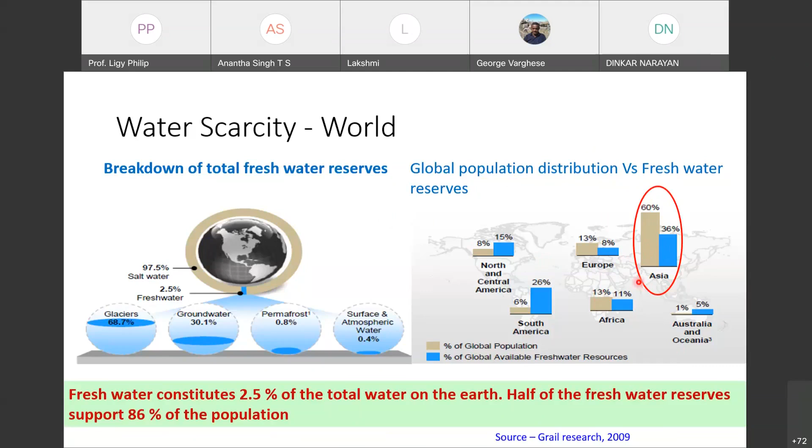But when we come to the Asian continent, around 60% of the population is here, and we have only 36% of the water. So definitely, the maximum water stress or water scarcity will be faced by this region.

Now coming to annual freshwater withdrawal in 2013-16 data, you can see the places where maximum freshwater withdrawals are happening. America around 485 billion cubic meters per year, and India much higher, 761 billion cubic meters per year, and this is China. So these are the major countries contributing maximum withdrawals.

And if you see the water usage, maximum water is being used for agriculture purposes, more than 80%. Then domestic contributes around 5 to 10%, then industrial use. And between whatever we are extracting and consuming there is also a gap, because a lot of losses are happening. That's why you can see the difference between extraction and consumption.

And wastewater generation in India is around 13.87 billion cubic meters per year. A large quantity of wastewater is getting generated, and many agencies have stated that nearly 6 billion people will suffer from clean water scarcity by 2050. It is going to happen, and this is the data shown by NITI Aayog recently.

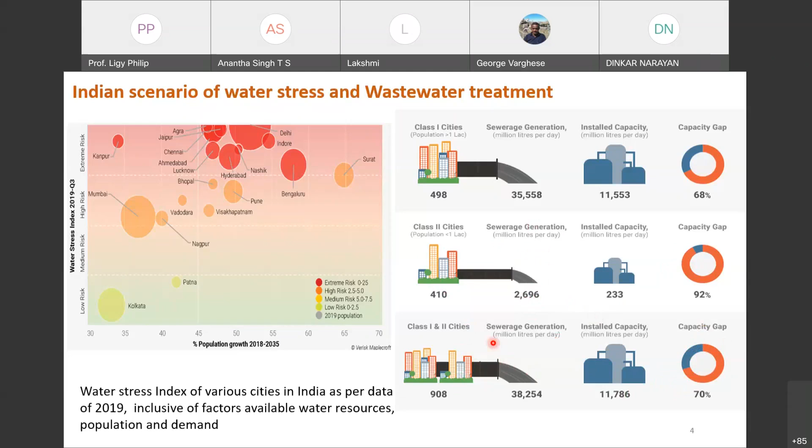So now, when we discharge untreated or partially treated wastewater, a lot of organic matter is there, and biodegradable organic matter is relatively easy to degrade.

But even if you treat, most of the treatment plants will not be taking care of the emerging contaminants like pharmaceuticals, personal care products, etc., and nutrients present in the wastewater. So when we discharge this, pollutants will be remaining in the partially treated wastewater, and they are mostly persistent. So they will be contaminating the water sources where it is being discharged.

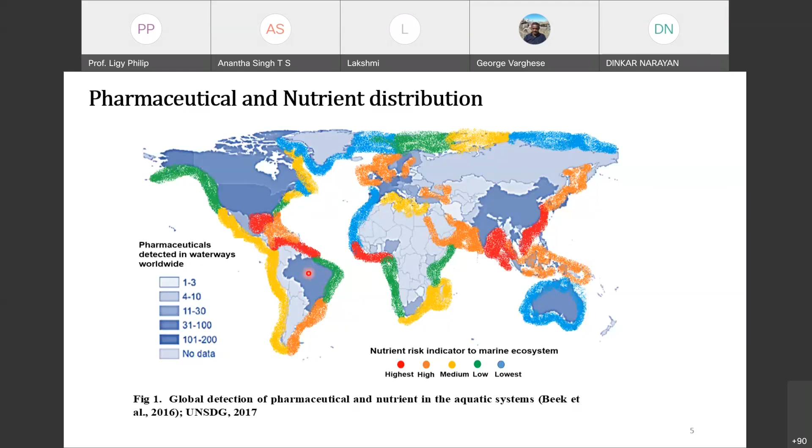So now, coming to the current wastewater treatment practice, if you see, what are we doing?

Are you able to hear me? Yes, madam. Yes. Yeah, because somebody was telling that there is an audio problem. Some message I have seen on that side. Yeah, I'm sorry.

Current wastewater treatment practice. So we are generating wastewater without any control, and in some places it is collected, and in some places it is not getting collected, and treatment is there, and no reuse and recovery. Most of the water is getting disposed into the existing water bodies, with mostly primary or secondary treatment. And we have seen that only 30% is even getting secondary treatment. Others are not even getting that. And in many places treatment compliances are not there at all. So this is the present scenario.

But if you want to be sustainable, this is not what we have to practice. We have to reuse and recover all the resources, but that is not happening much nowadays. So that's what I told. We have to meet the treatment compliances and go for circular economy. This is the only sustainable way. So when we want to reuse and recover the resources, we have to care about the residual pollutants present in the system, their after effects, the risk posed by them and all the things. And we should have technologies to remove even the minute quantities of these emerging contaminants. Otherwise, if you go for circular economy, it will create more problems than solutions in the long run.

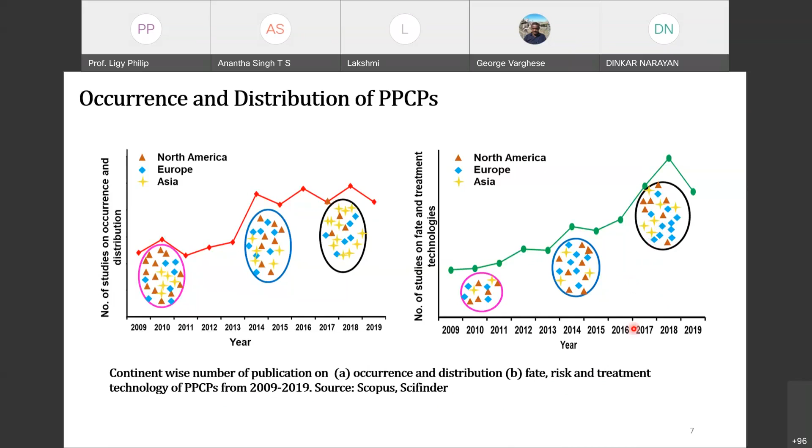In the different regions: initially it was dominated by North America and Europe. Then Europe took over, Europe also came up to that level, and you can see that Asian studies were very, very limited. But now most of the Asian countries are also concentrating on this because they realize the importance of these aspects, how much problem it can create.

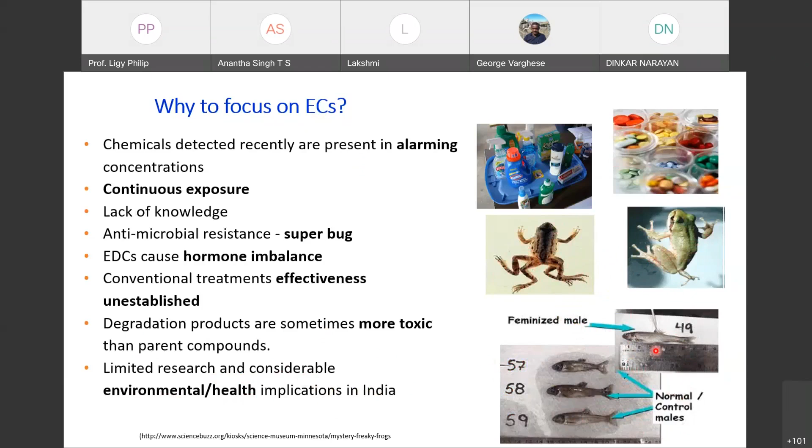In India, only very limited research is being carried out, and there are considerable environmental and health implications for India. That's why we have to concentrate on these emerging contaminants. These are some examples: a feminized male frog, normal control males and feminized, and you can see deformed aquatic organisms. So these are all the problems of ECs, and definitely we have to attend to the awakening call.

All over the world, the presence of antibiotics in sewage is reported, and sewage can be a major source of antibiotic resistant microorganisms and antimicrobial resistance genes. The interaction with bacteria in sewage treatment plants is a main consequence of the development of antibiotic resistant bacteria. And the NDM-1 gene, known as New Delhi metallo-beta-lactamase 1, also called the superbug, was discovered in Delhi. NDM containing bacteria are resistant to a broad spectrum of antibiotics.

A lot of issues are coming up about antimicrobial resistance, and these genes can get transferred to other microorganisms, and this will be enhanced in the presence of other pollutants like heavy metals. So we have to be extremely careful about these emerging contaminants, otherwise it will lead to a lot of problems. Imagine a superbug causes an infection for you, and none of the available antibiotics is going to work. What will be the scenario? It will be worse than COVID.

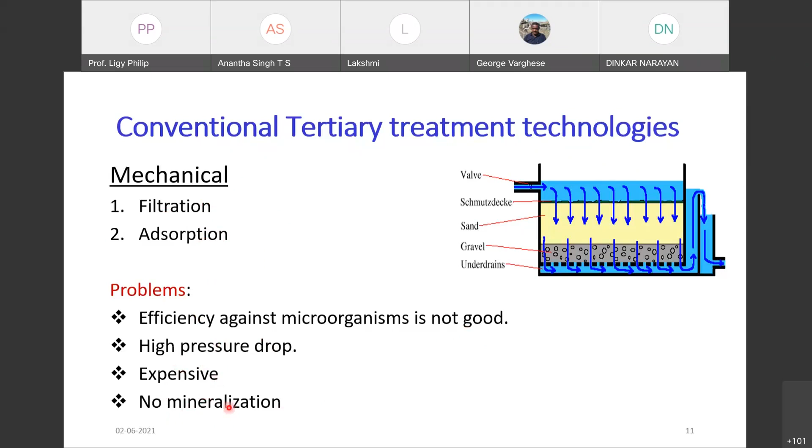This one will be able to remove your suspended solids and all, but when it comes to emerging contaminants, it may not be that effective. Something may get removed, but it will not give you complete protection. What are the problems with this one? Efficiency against microorganisms is not good, because you will still be having fecal coliforms, and there's high pressure drop, it's expensive, and there's no destruction of the pollutant. These are the major problems.

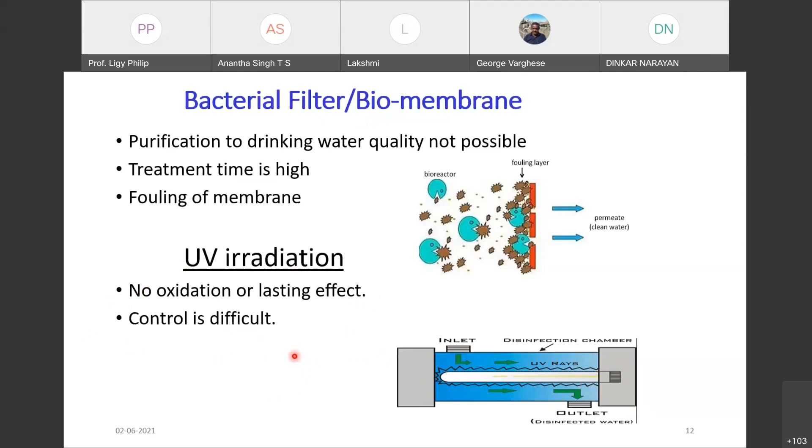Another tertiary treatment we adopt is UV radiation. UV radiation will just be denaturing, deactivating the microorganisms, and it is not a lasting effect. Sometimes even the microorganism will repair itself and come back. And if you have a lot of suspended solids and dissolved organic matter, UV radiation will not be effective. So control is difficult. This is another conventional method.

Then we know chlorination. Many times we use it because it will be able to remove many of the residual organic compounds. Many times we have to add exact doses of chlorine, but many times what they do is fix a dose and add that one. So that will be oxidizing only easily degradable organic matter, and the remaining everything will be left over.

Another major problem is formation of chloramines, and you all know that these chloramines are carcinogenic compounds. Then if you add more chlorine, there will be a residual chlorine effect. And if you add insufficient dose, bacteria become partially resistant.

pH is also very important. Chlorination will be effective in acidic pH, not in alkaline pH, because when chlorine is added to water, it dissociates to form HOCl and HCl, and HOCl will dissociate to form OCl minus. OCl is not as effective compared to HOCl. One should know all these things when doing chlorination.

So now people are talking about advanced oxidation processes. There are various advanced oxidation processes available: heterogeneous Fenton, homogeneous Fenton, photo-Fenton, photocatalysis, ozonation. In all these cases, what are we doing? We are generating hydroxyl radicals. This hydroxyl radical has much higher oxidizing capacity compared to oxygen - its E naught value is 2.80, which is much higher than oxygen.

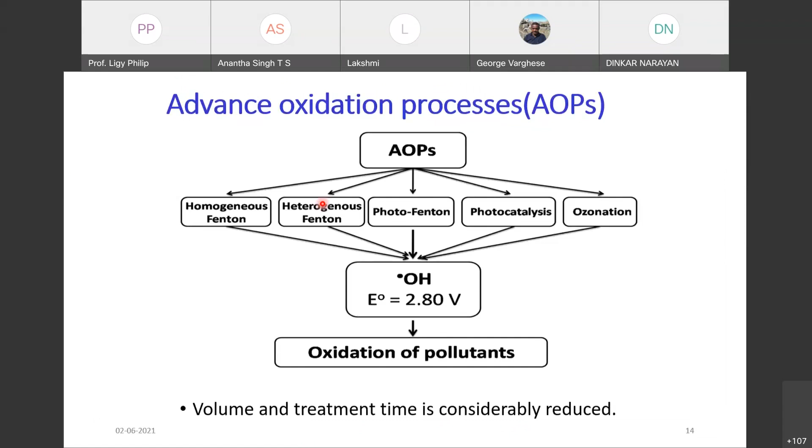Now we'll also see what methods are adopted for treatment of pharmaceutical industrial wastewater. They use physical treatment, biological treatment, and advanced oxidation process. Physical treatment includes coagulation, nanofiltration, reverse osmosis, adsorption, incineration, scrubbing - depending upon the type of pollutants. For biological treatment, they go for activated sludge process, biological aerated filter, rotating biological contactors, UASB, etc. And advanced oxidation process includes Fenton process, ozonation, photocatalysis, electrochemical treatment methods. All these things are being employed in pharmaceutical industry for treatment of wastewater.

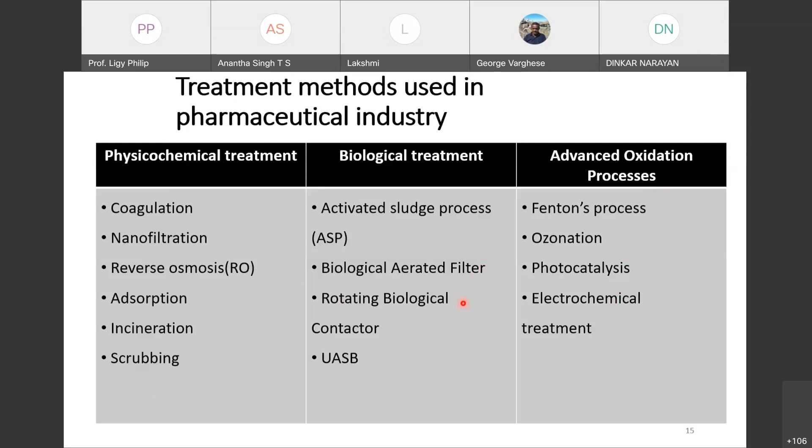But the limitations of conventional treatment methods, as I explained - nanofiltration has membrane fouling and huge concentrate volume. So managing this will be a big problem.

And when we come to adsorption, dissolved organic compounds and surfactants compete with binding sites, and there's the production of activated carbon. Another thing is here only the phase transfer is happening - you will not be able to destruct the pollutant, you are just changing the phase of the pollutant from the liquid phase, transferring it to the solid phase. But there is again a problem to treat the spent activated carbon and regenerate it.

Incineration requires energy, and scrubbing requires costly chemicals and their safe use and disposal. So these are the problems. Many places we have to use some sort of chemical or material, and that will be increasing the cost.

Now coming to biological treatment process - temperature, organic and toxic substances will all be affecting the performance of biological treatment. And chlorinated solvents are recalcitrant, and many of these PPCPs are also recalcitrant, so they are not removed by the microbes.

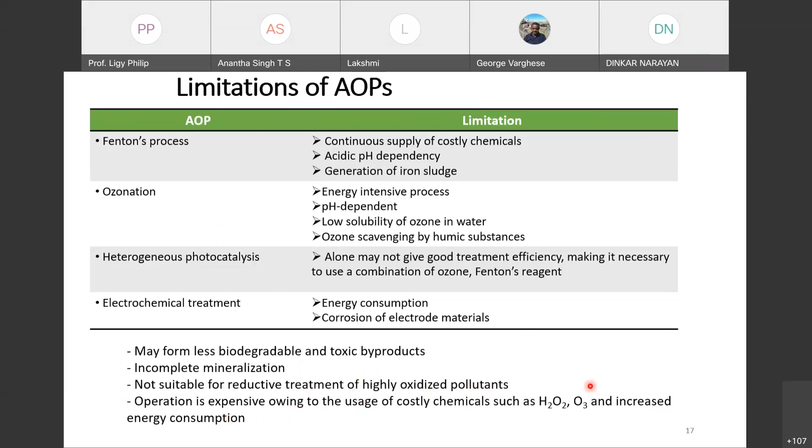Now we'll talk about pulse power plasma. Hope most of you have heard about this technology. Here we give a high voltage electric discharge, and as a result plasma is generated with physical and chemical effects. It will be having a large amount of oxidizing radicals like hydroxyl radical, nascent oxygen, and molecules like H2O2, O3, along with electrons, H, shock wave, and UV light. So oxidizing radicals are there, reducing radicals are there, molecules are there, shock wave and UV light are there. You'll have a very, very reactive environment when we apply this high voltage electric discharge.

Another thing to remember is no chemical addition is needed, no demand on temperature and pressure, and it is insensitive to contaminants. So we don't have to bother about the organic loading rate, and even if the loading is not continuous, the system is not going to be affected. It can be used for treatment of contaminated water, air, and soil.

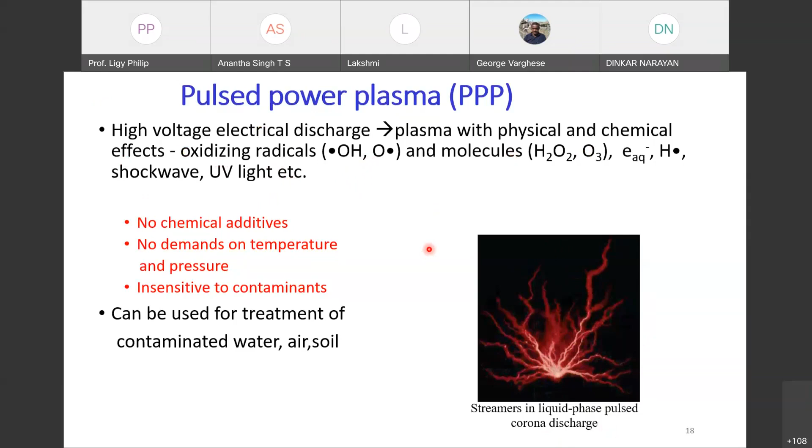Here, what we are doing is high voltage pulse corona streamer discharge. We store a lot of energy and then do a sudden release. When we do a sudden release, a lot of energy is generated. Imagine a dam with a lot of water and we open it instantaneously - what will happen? Lot of energy. Or how are we kicking a football? You kick the ball and at a stretch give a lot of energy. That is what is happening in high voltage pulse corona streamer discharge.

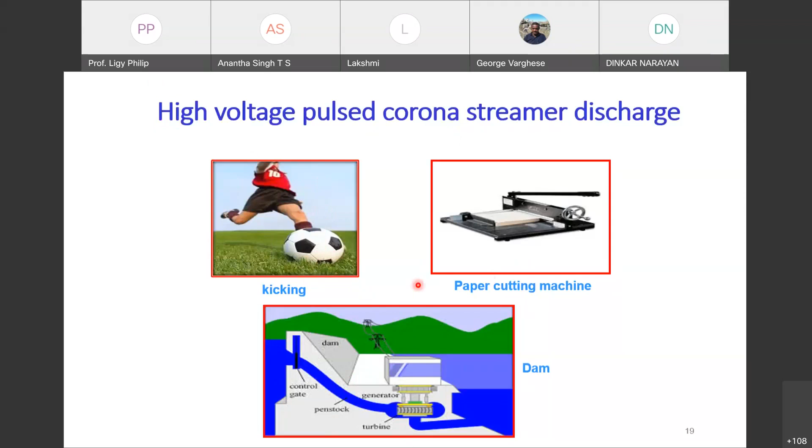So you have dissociation, and vibrational or rotational excitation. Dissociation: water plus electron gives you OH, H dot and E. Ionization gives you 2 electrons and H2O plus, and H2O plus H2O gives you OH and H3O plus.

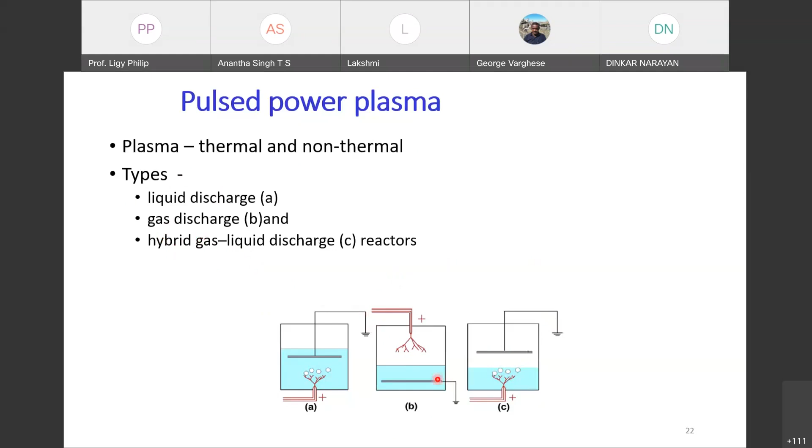And hybrid - you can see some amount is in the liquid and some in the gas. So depending upon your requirement and the nature of the pollutant, you can adopt any of these methods.

So I'll give a summary of this plasma technology. Plasma generates energetic electrons, excited species, free radicals, ions, molecules, and photons. All these we get, as you've seen in the reactions, produced by the ionization of gas through high voltage electric discharge, initiating a series of chemical and physical reactions and effects.

And reactive species, as I already mentioned, all these species are generated. So you can have oxidation, you can have reduction. Highly oxidized compounds and highly reduced compounds can be treated by this method.

Am I audible? Yes madam, yes madam, audible, but at times there is oscillation, some sort of disturbance. So maybe the net problem - I won't be able to do much about it.

So when we talk about plasma technology, it is a combination of various advanced oxidation processes. We have seen various advanced oxidation processes, but when we talk about pulse power technology, we can consider it as a combination of all these AOPs, or it will have the effect of all these advanced oxidation processes, because you get all the species usually present in advanced oxidation processes, and you also get some reducing species.

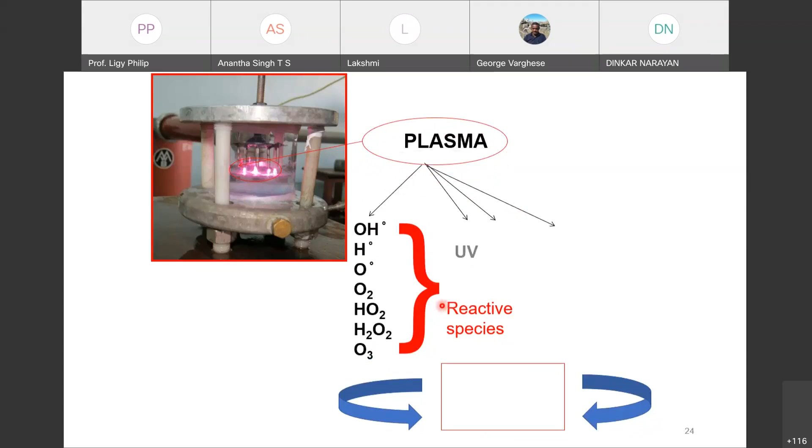So what are the things here? You have OH radicals, H radical, O, O2, HO2, H2O2, O3, UV, high electric field, intense wave. If you see the oxidation potential: hydroxyl radical 2.8, nascent oxygen 2.42, ozone 2.07, H2O2 1.78, and oxygen is around 1.42 or something like that.

So everything is having very high oxidation potential.

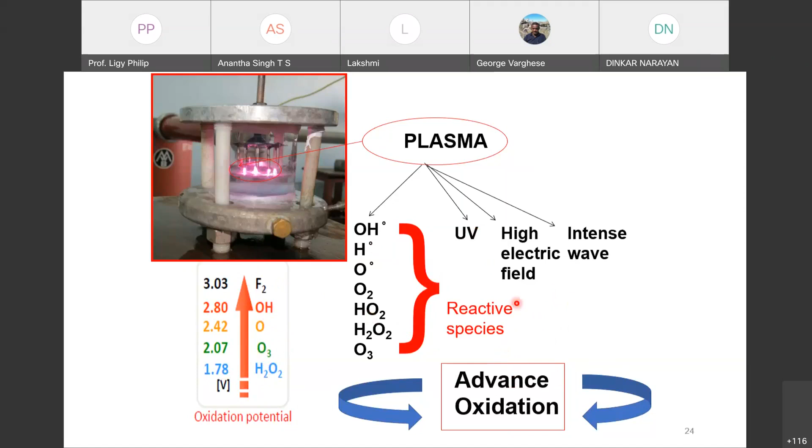So naturally it is an advanced oxidation process, and I also told you it is capable of reducing the compounds also. So first I will talk about how we started the initial things, because nobody was aware of this one. So we just started in 2013. The first person who worked in this area with me was Dr. Raj Kamal. So initially we had to understand all the mechanisms.

So we did the reactor setup, optimization of electrical and physicochemical parameters, quantification and kinetic study. Then we carried out a batch study to understand, then mechanism of degradation, toxicity. Then we went to a continuous study. So this is what we did first, and what we did after that, I'll explain during the course of time.

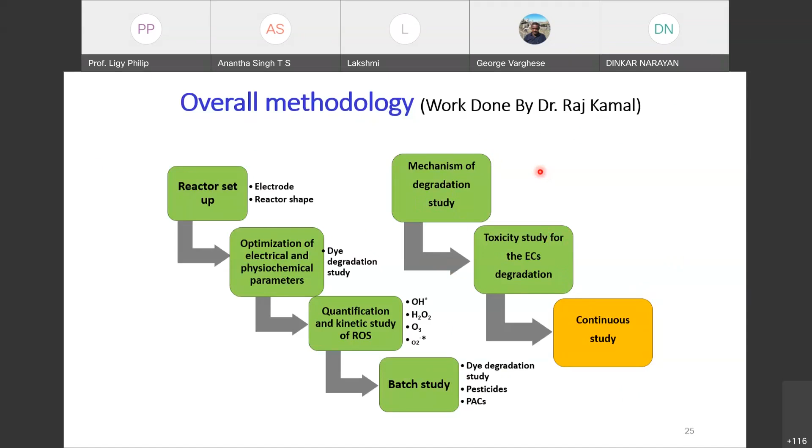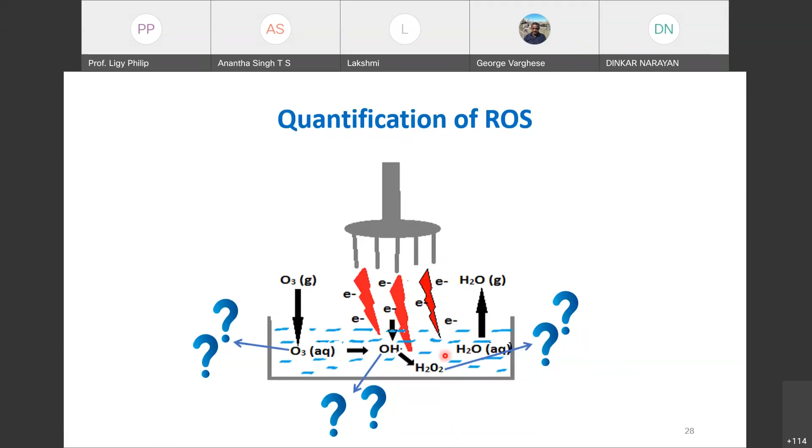Initially we did not know how to quantify all these things, so we had to develop the methods. For hydrogen peroxide, we followed the reaction with the titanyl ion. For ozone, the DPD method we followed. For OH radical, the hydrazone reaction, detected by HPLC UV visible. And for superoxide radical, the nitro blue tetrazolium chloride method we used for the quantification.

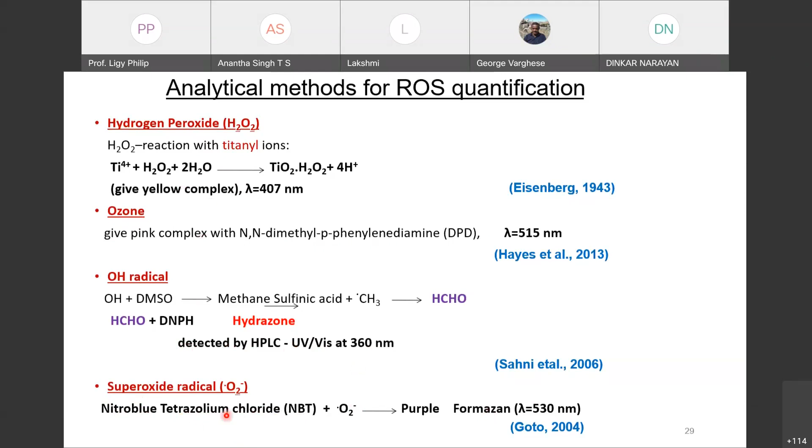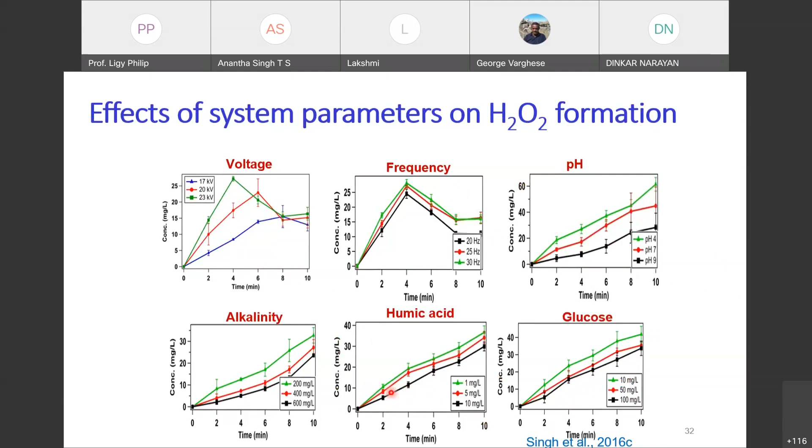Similarly, we have looked at hydrogen peroxide formation also. It was showing the same trend, but you can see that after some time the concentration is decreasing. I told you what the reason is. So here alkalinity, humic acid, glucose, all those things we have looked into. Similarly, we have looked into other parameters also.

Now I'll get into the degradation studies: emerging contaminants degradation using pulse power. So what are the things we looked into? How it is happening, what is the kinetics, what is the degradation pathway, whether mineralization is happening, whether the toxicity is getting removed. All those things we have looked into.

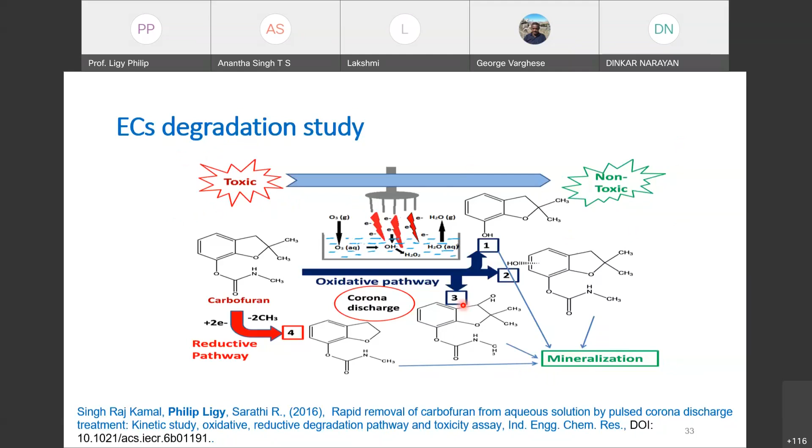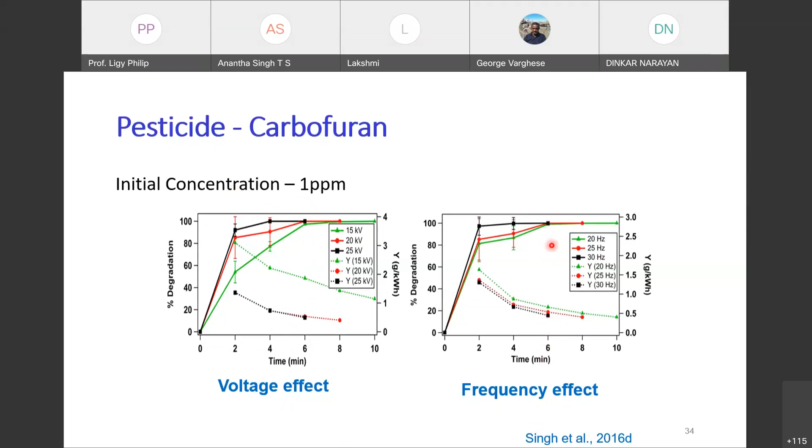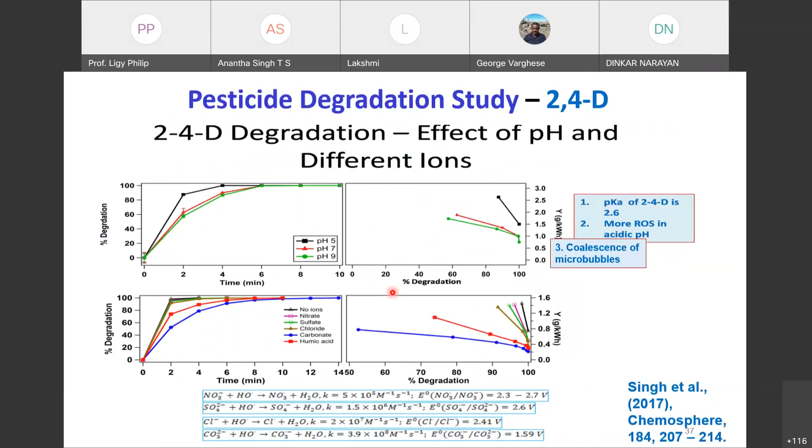If you want this one, we have a large number of publications related to pulse power technology. You can see those things. I'm not going into the details of all. So that is about pesticides. Now we thought that we'll look into pharmaceutically active compounds because that is the major concern nowadays.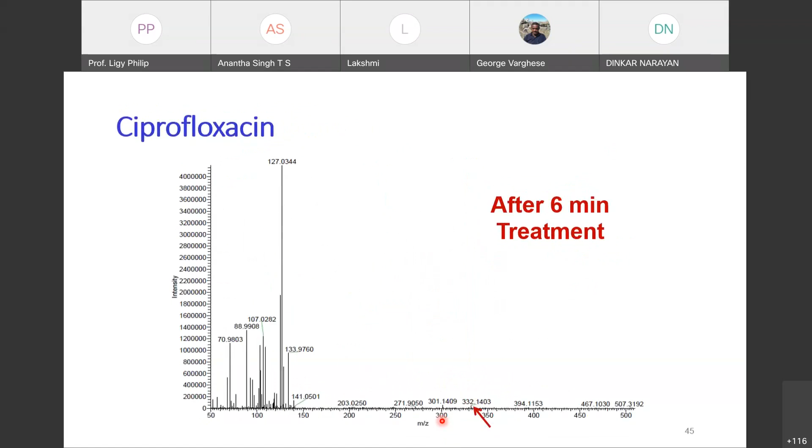And this blue line shows the rate constant per minute. So you can see that DCF is having a very high rate constant compared to ciprofloxacin, and I told you the reason. And the rate constant is slightly decreasing as the pH is increasing, as the alkalinity is increasing, as the humic acid concentration is increasing. But it is not significant. What I am trying to tell is, this very clearly shows that at field conditions, the technology will be working, because we have tried all the adverse conditions.

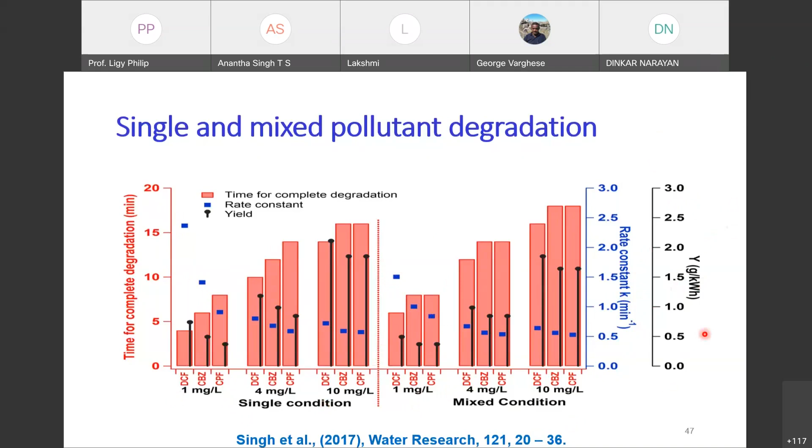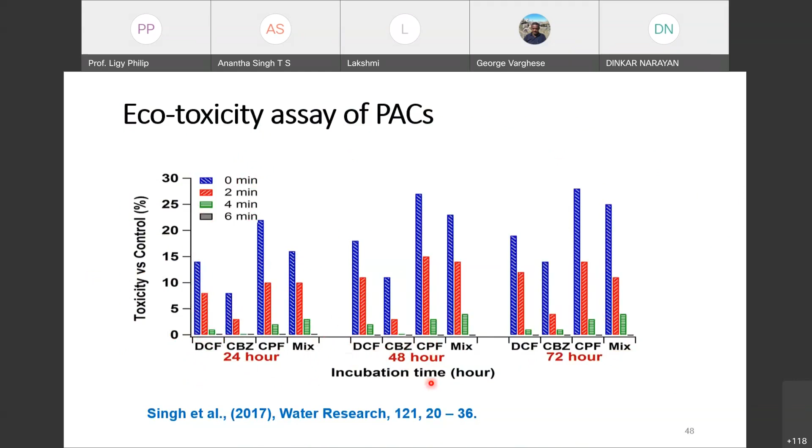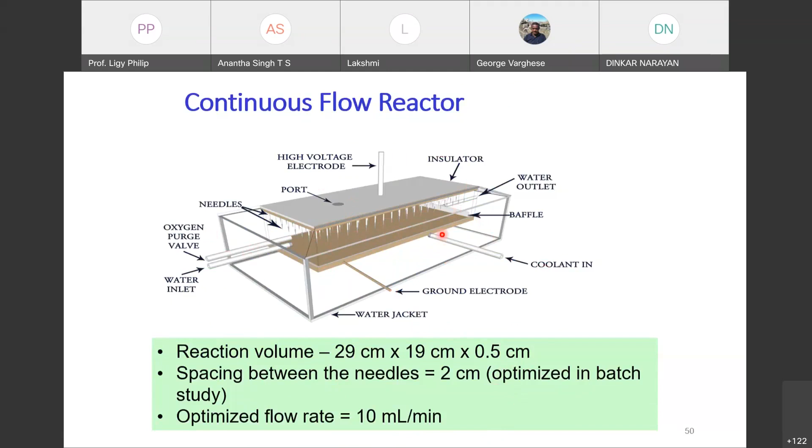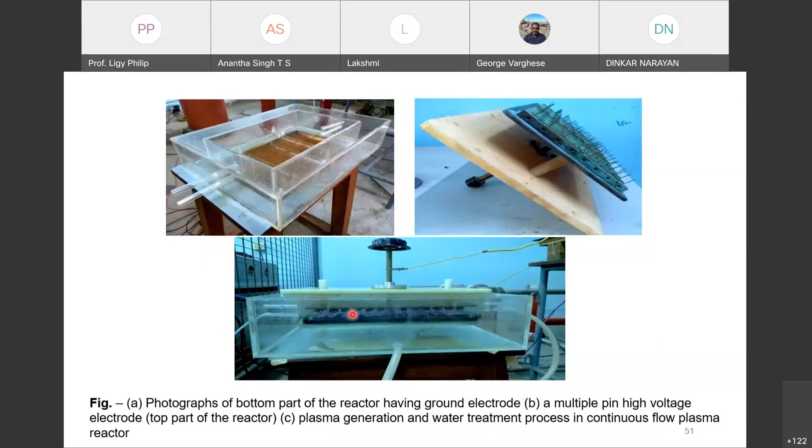So then we have gone for a continuous flow reactor. Very small system, just to see whether we'll be able to. Very primitive way of treatment. So this is the spacing needle. This is our bottom plate, continuous flow. You can see all the needles here. And you can see the pulse power. This blue color you can see, isn't it? Where the plasma is generated.

So I'll stop here and I'll take questions for now. Then afterwards I'll continue the remaining thing. Yes. Madam, I'll read out some of the questions that are already there in the chat box.

So one is, is plasma technology cost effective when it is implemented in real-time treatment plants? It is cost effective. I have a table I'll show you, compared to other advanced oxidation processes which are used for treating this type of compounds, for example, pharmaceuticals, personal care products, etc.

So compared to other advanced oxidation processes, this is cost effective. So there is no problem. Only cost is the power cost, and we have calculated the cost based upon our batch system. Now we have a pilot scale system, so we could see that the cost is coming down significantly, because as the volume increases, the per unit cost is coming down significantly.

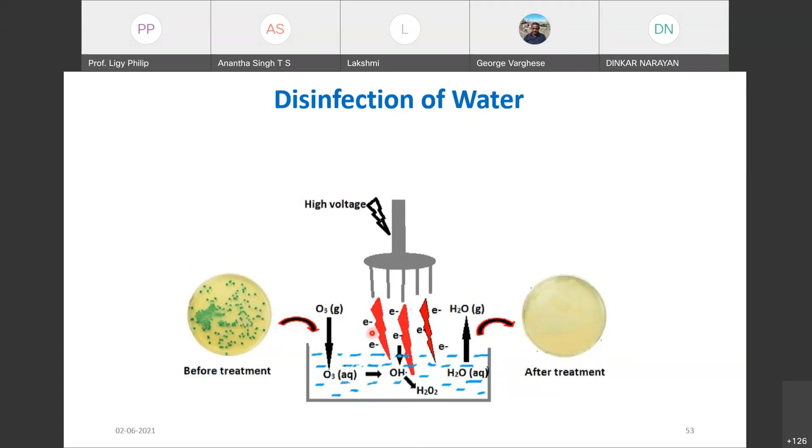So until now we were talking about pharmaceuticals and personal care products and pesticides. We thought about whether this technology can be used as a single technology for tertiary treatment. Then we have to look into the disinfection efficiency of the system also. Before treatment, you can see that so many bacteria were present, and after treatment, everything is removed. We used E. coli, and the tryptone and plate count method was used.

We have used a bacterial concentration of around 10⁶. The reason we used such a high concentration is everything was getting killed in no time, so we were not able to measure when using low concentrations. Here you can see 10 minutes of continuous pulse, then 5 minutes with a 2 minute gap, then 2 minutes with a 1 minute gap, for 10 minutes total. If you give a 2 minute pulse and then a gap, that was much more effective than continuous application.

Continuous giving is interesting - why I'm telling you this is that with continuous giving, a lot of radicals will be generated and they themselves will be reacting and many will be getting nullified. So you will not be getting complete effect. So if you give a gap - 2 minutes, then 1 minute gap, again 2 minutes pulse, 1 minute gap - within a short period you will be getting much more efficiency.

So 10⁶, bacterial concentration has come down to 0 in 6 minutes time. Because if you go for any other disinfection method, it will take much more time.

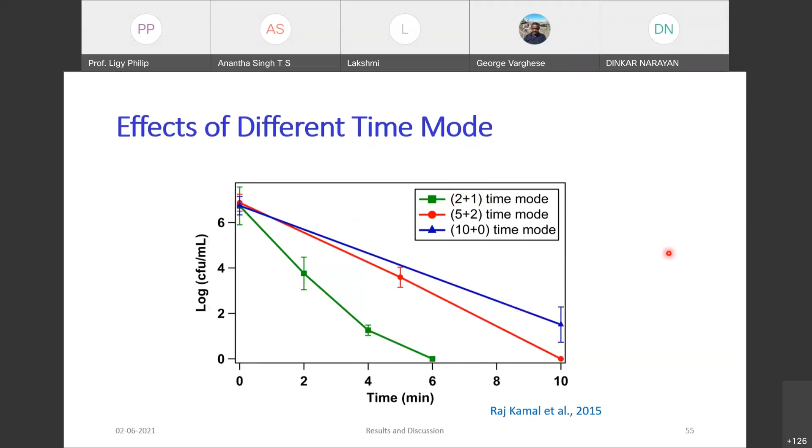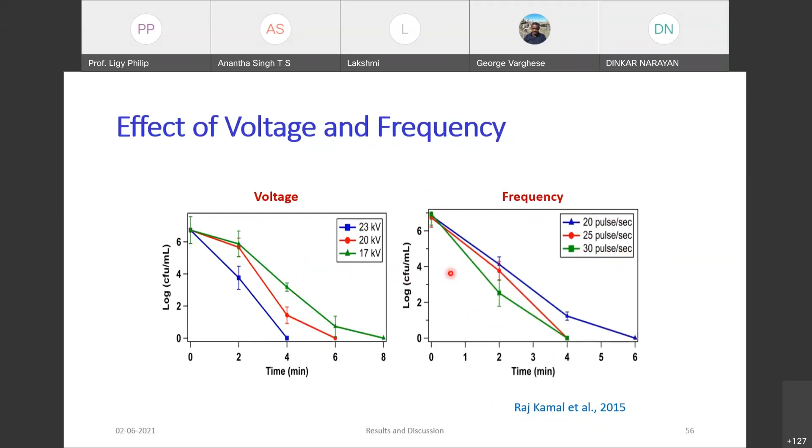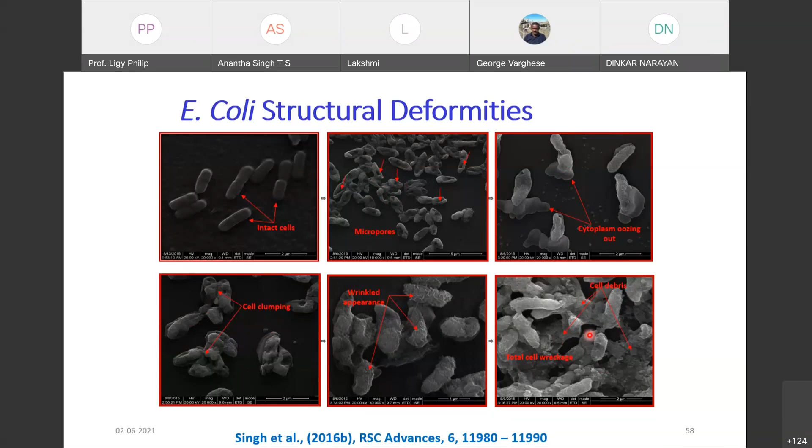Initially micropores were developed - you can see the pores in the cell. Then cytoplasm oozed out. These are all 6 images at different time periods we have taken. After this oozed out, all the cells were clumping together, a wrinkled appearance was seen, and total cell wreckage was happening. This shows very clearly that complete microbial cells were destructed - it will never come back.

We also looked at the LDH release into the system - how with respect to time, the enzymes, proteins, were released from the cells at 2 minutes, 4 minutes, 6 minutes, 8 minutes. You can see here protein concentration from cells and protein concentration in cell-free supernatant. From the cell, protein concentration came down, meaning it was oozing out, and in the cell-free supernatant that concentration increased.

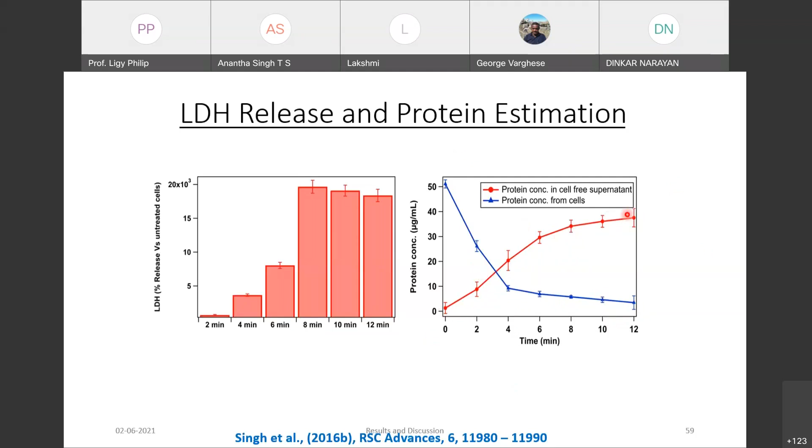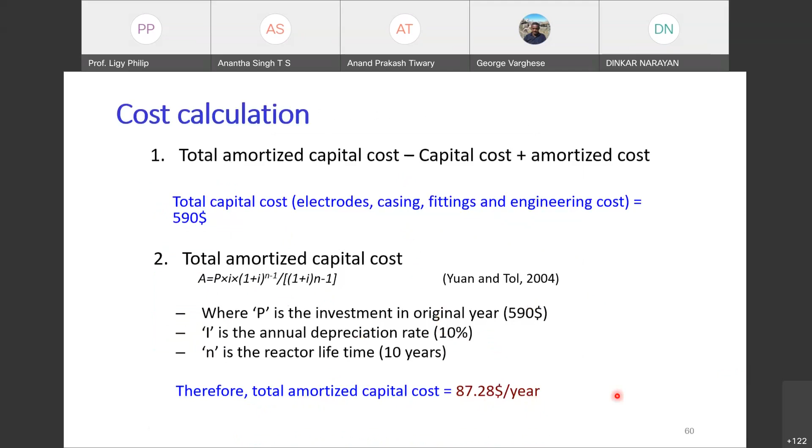So this is the total cost we have calculated, based upon the batch system. Total amortized capital cost is around 87.28 per year, and treatment cost is coming around 9,384 per meter cube. Yes, it is a very high cost, because we calculated this based on the batch system.

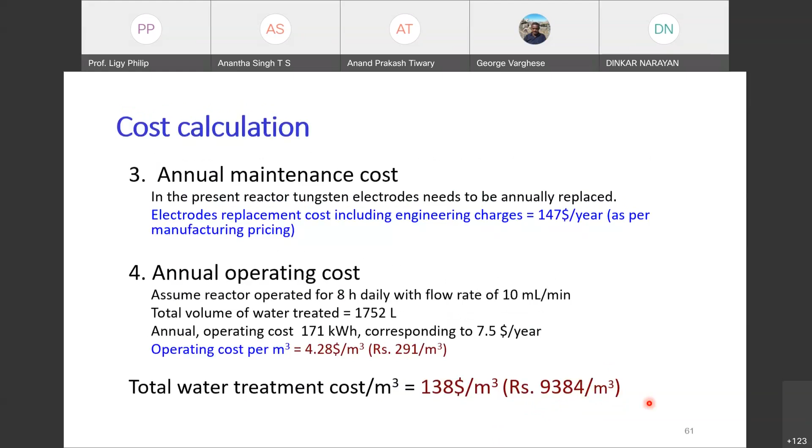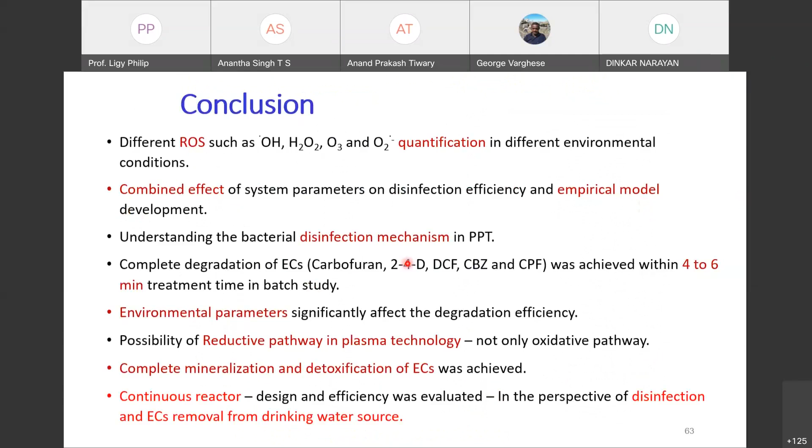Then in conclusion - I don't want to read everything - different ROS and the combined effect we have looked into. You have seen this, but yes, we have faced a lot of challenges.

Selection of reactor configuration for ECs degradation was a challenge, because many of the reactive species were escaping from the system - mass transfer was not happening, so not even 20% of the species was utilized for degradation. Electrode material erosion and rust was a big problem. Scaling up the reactor in continuous mode, maintaining uniform distance between electrode and water, was a problem. Efficiency was not in accordance with the design of the batch reactor, and nitrate generation and pH dropping in the treated solution was another problem. So these were the challenges.

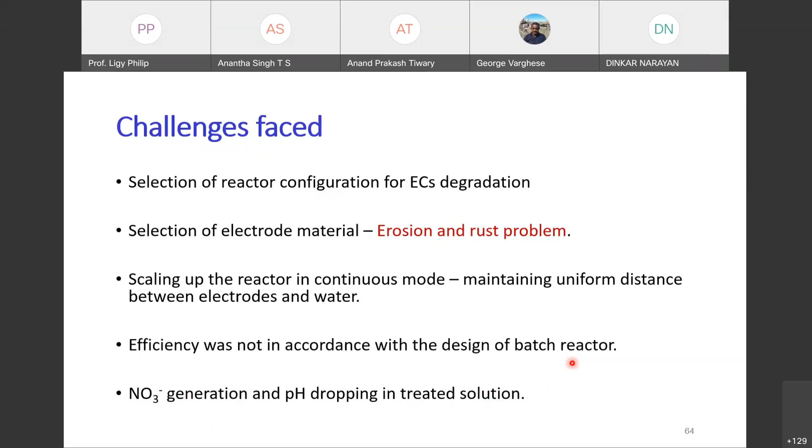So then we decided to take care of each of these challenges - that is what I am going to talk about now. So you are able to see this on my screen.

Yes, madam. Yes, yes, it is clear.

So first, what we have done is we have gone for sequential flow plasma reactor. Much of the reactive species were just staying there, and mass transfer was a major problem. What we did is we thought instead of keeping the water stationary, it may be better to spray the water into the electrode. The water was pumped from the reactor and sprayed into this region, so the contact will be much better because it will be in fine bubbles. The surface area is much more, so the diffusion of the reactive species will be much better. So this is the sequential flow plasma reactor.

Earlier we were getting a nitrate concentration of around 230 milligram per liter. In the sequential flow plasma reactor, the nitrate concentration also reduced significantly because the plasma is not continuously in the air, and nitrogen is not getting reacted because other reactive species are available here. So much of the plasma is used to treat the pollutant rather than generating nitrogen. This is the way nitrate is created in the system, and hydroxyl radical is getting generated.

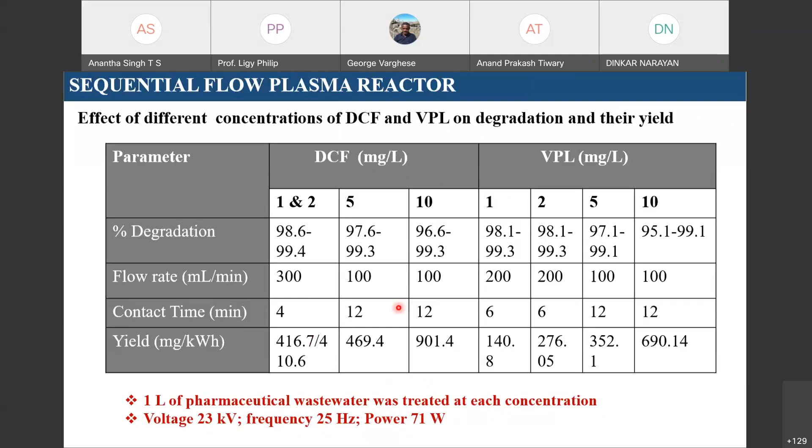So here what I was telling is at different contact times, you are getting 98.6% DCF degradation at different concentrations - 1 and 2 milligram per liter, 5 milligram, 10 milligram. So what I am trying to tell is in the continuous system, you are getting a better efficiency and yield.

Even TOC removal is 99%. Yield is very high, and nitrate generation is reduced significantly - we were getting only 8.6 milligram per liter, and nitrate permissible limit is 45 milligram per liter. Here tungsten electrode and copper ground we have used. No recirculation, water jacket is not needed, and high yield we got it.

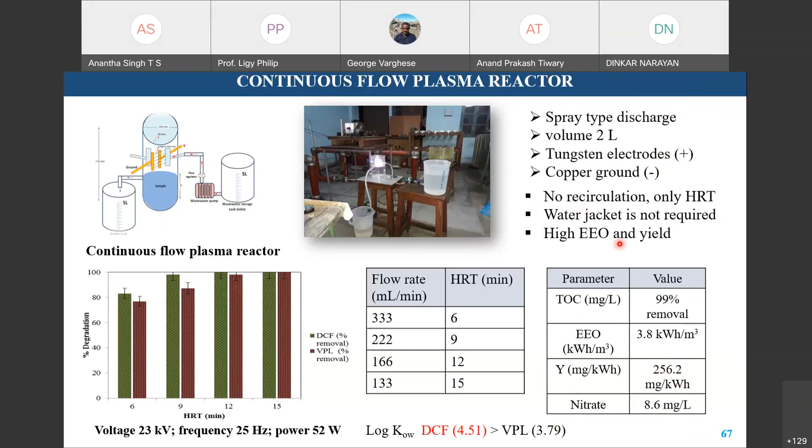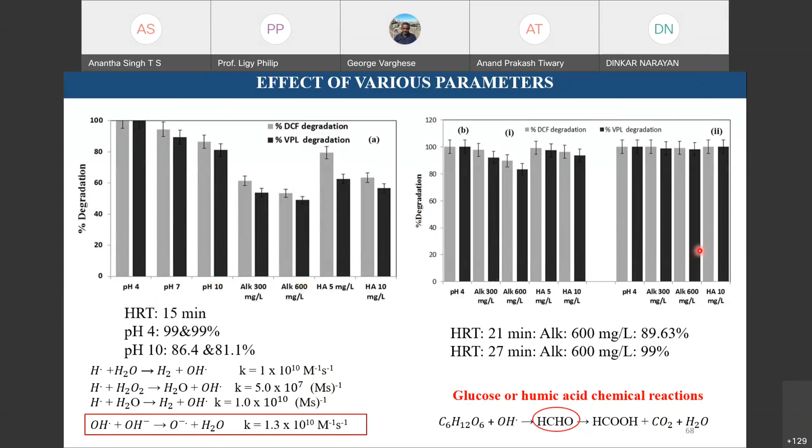Okay, so for pH, we have done all other studies in continuous system. How different pH, alkalinity, humic substances, glucose, all those things getting affected, and you can see that everywhere you are getting significantly high removal efficiency.

This is also for different flow rates or hydraulic retention time, degradation and yield. You can see that as the contact time is more, your degradation efficiency is more, as expected. This is for 4 milligram and 10 milligram, because at 1 milligram, it was getting degraded within no time, so we were not able to measure anything.

So that's why we went for a higher concentration, and this is the yield. Yield will definitely be reducing when the flow rate is less, because up to a certain level the degradation will be very fast, and the concentration gradient plays a significant role. So if you want 100% degradation, towards the end your yield will be slightly reducing, but you are still getting significant yield here. These compounds also we were able to degrade completely.

Here you can see that yield was increased more than 2 times in the continuous system. We also looked at whether complete degradation is happening, and we could see that everything is happening.

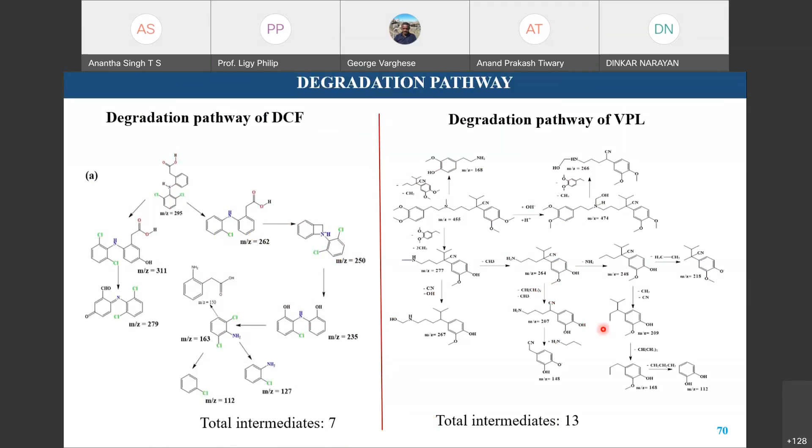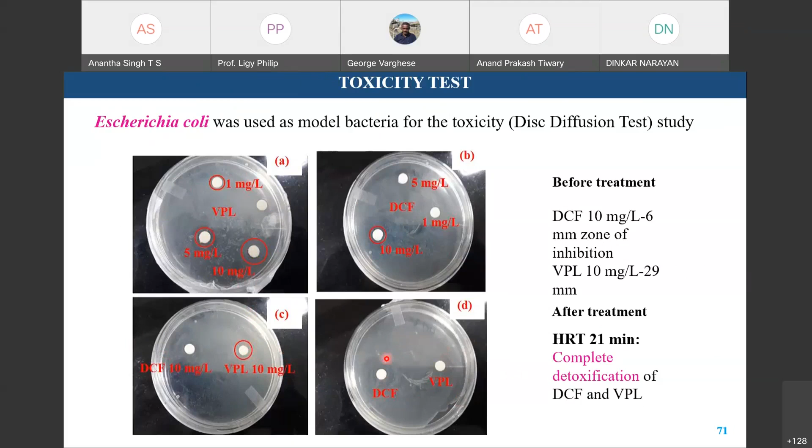And here also we did the toxicity study, because we cannot tell just by analyzing the parent compound whether the things are getting degraded, and the toxicity. You can see here this is the zone of inhibition. Here it is reduced, and here nothing is there. This is for 10 milligram, and after a certain time, around 21 minutes, we were not having any toxicity.

So this is the batch reactor studies. Everywhere, whatever I discussed is summarized here.

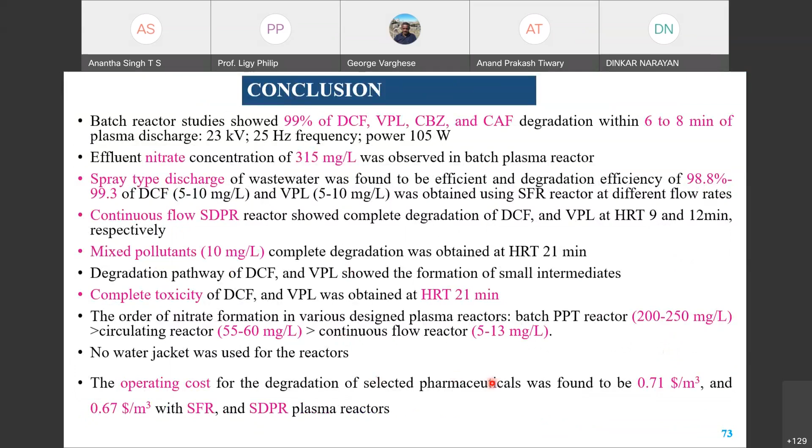Now, based upon that, we have made the pilot scale reactor. You can see these are all the plasma reactor; we took the photo in the evening so the plasma can be seen very clearly. This is a 1 meter cube reactor, 1 meter cube for 8 hours, 1 meter cube per day reactor.

You can see that for the pulse created, we are spraying the water here, and within 6 minutes HRT, all the residual pollutants from the secondary treated water are getting removed. This is working in our STP now.

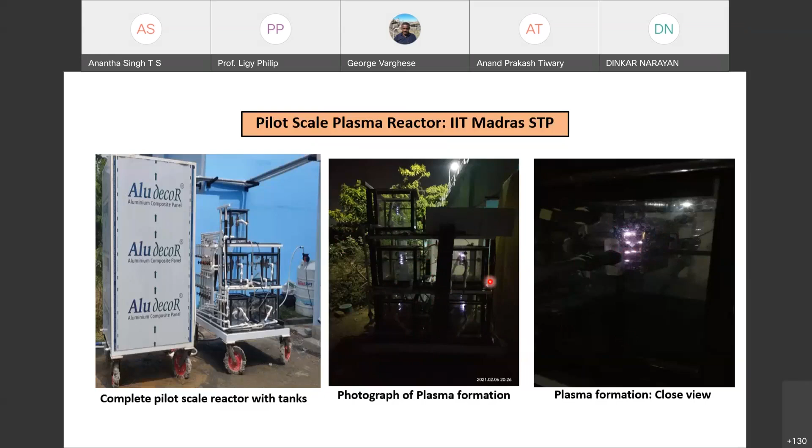Now I'll talk a little bit quickly, under 15 minutes, about pharmaceutical wastewater treatment using pulse power plasma technology. Now we were looking at treated water where low concentrations are present, and how it is effective. But when we go to pharmaceutical wastewater, not only pharmaceuticals but other VOCs are also present.

We were looking into chloroform, chlorobenzene, toluene, MIBK, and their mixtures, and how they would degrade, because these are major compounds present. The pharmaceuticals will be at very, very low concentration in pharmaceutical wastewater.

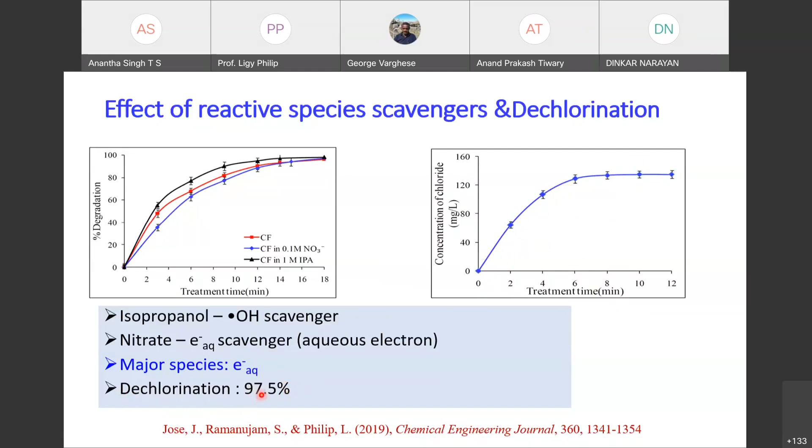So you can see that when hydroxyl radical is scavenged, you are getting a better removal, but when nitrate is put in the system, the degradation reduced. That means the electrons are playing a significant role in the system. And we also looked into the dechlorination, because if chloroform degrades, chlorine will be coming into the system, and stoichiometrically we have seen 97.5% of dechlorination has occurred in the system.

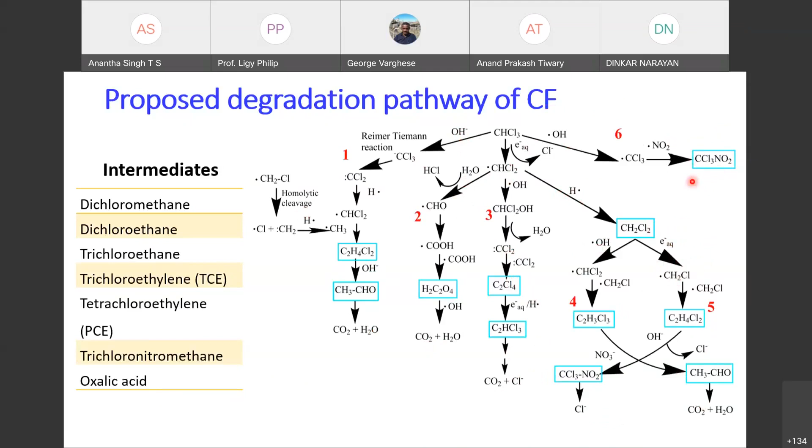Then the proposed pathway. Here you can see different pathways. Everywhere it is getting converted to carbon dioxide and water, or carbon dioxide and chloride. Different pathways we have proposed. Somewhere hydroxyl radical is getting involved, somewhere it is reductive degradation, and we are getting this type of intermediate also. And byproducts and intermediates during the degradation.

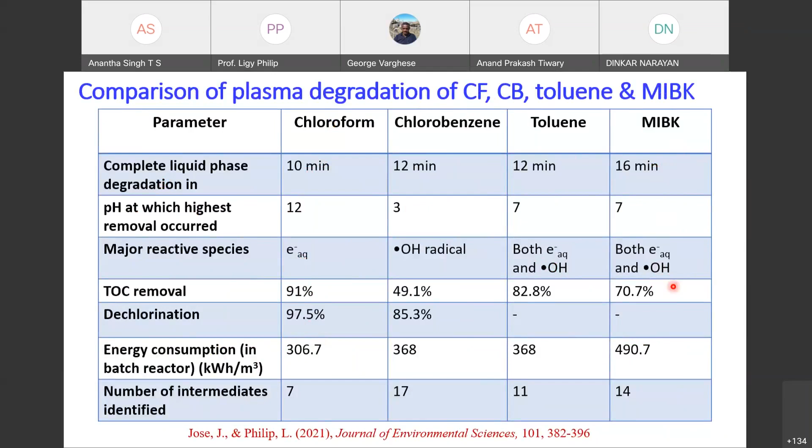Then comparison of plasma degradation of chloroform, chlorobenzene, toluene, and MIBK. Complete degradation, the pH at which highest degradation happened, major reactive species. For chloroform, it is electrons. Toluene, both electrons and hydroxyl radical. MIBK also both. All those things we looked into.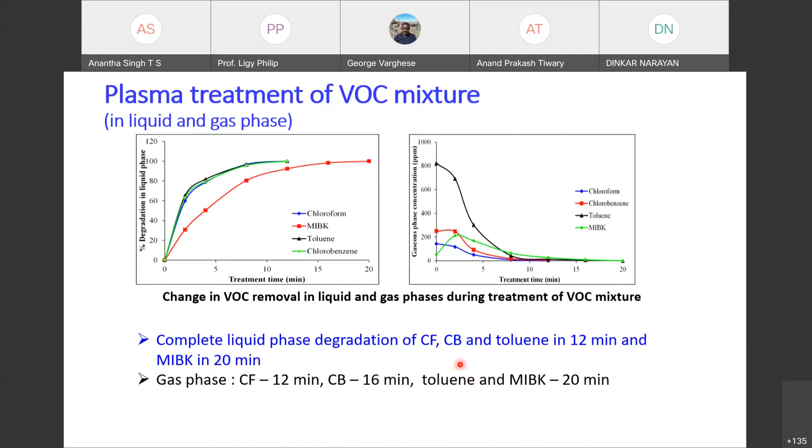Then the effect of various electrolytes, organics, and turbidity on degradation efficiency, because if you go for a real wastewater, all these things will be coming. So this is carbonate, phosphate, sulfate, chloride, nitrate. You can see here, if sulfate is present in the system, your degradation is much better. Then chloride also enhances the degradation. I am comparing it with the distilled water.

So chloride, sulfate, and even nitrate enhance the degradation, because they will be forming the corresponding radicals. Sulfate, chloride, and nitrate enhance CB removal. So how? You'll be getting the Cl radical, then HOCl, all those things, and sulfate will give you sulfate radical. Nitrate will give you nitrate radical. That is the reason why there was an enhancement in

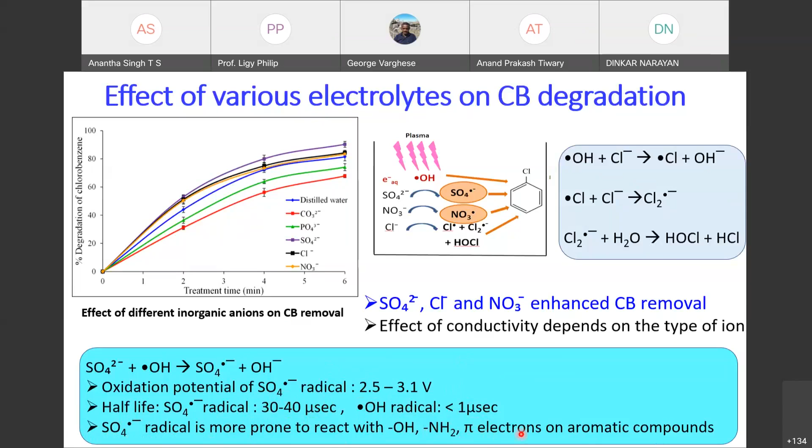the removal efficiency, and the oxidation potential of sulfate radical is 2.5 to 3.1, whereas hydroxyl radical is 2.8. Half-life for sulfate radical is 30 to 40 microseconds compared to OH radical 1 microsecond. So this is more stable. So sulfate radical is more prone to react with OH, NH2, π electrons on aromatic compounds compared to OH radical. And formation of sulfate radical in the system.

So somebody was asking me how to find out the sulfate radical. Direct measurement is not possible, so we have done indirect measurement. Isopropyl alcohol is a good scavenger for both OH radical and sulfate radical.

Whereas TBA reacts around 870 times faster with OH radical than sulfate. So you do it with IPA and TBA, then find out the difference, and then you will be able to get the sulfate radical concentration.

So for CB, you can see that with isopropyl alcohol the degradation was less, but with TBA it is almost equal to the distilled water. That means sulfate radicals were more effective compared to hydroxyl radical. Only indirectly will we be able to determine that.

Then the effect of sulfate on OH radical concentration. We have done it at different sulfate concentrations. If sulfate concentration increases, OH radical concentration was decreasing in the system.

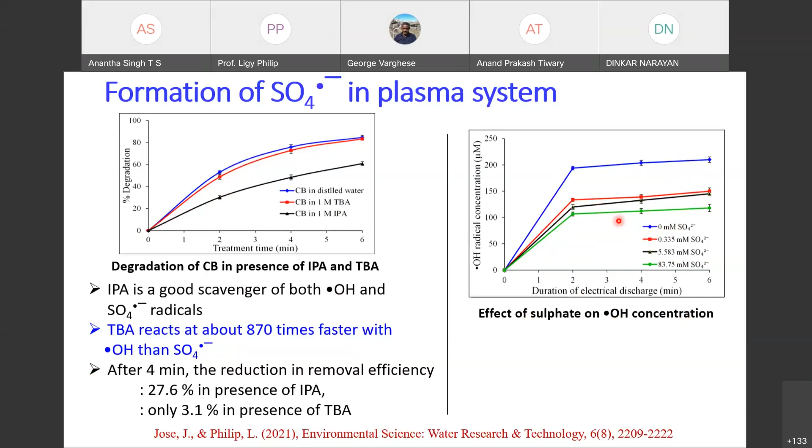The reason is VOCs are more hydrophobic. And the electron is responsible for the removal of chloroform. That's why removal of chloroform was not getting affected by the COD. But for other compounds, there was a reduction.

And the effect of turbidity on VOC removal, because your industrial wastewater will have turbidity or suspended solids also. So we were looking into turbidity, and you can see 0.7, 50 and 200 NTU, and the CF and CB removal. This is chloroform and chlorobenzene.

As the turbidity increases, there is a slight increase in removal efficiency in the case of CB. The reason is you can see that some flocs are forming and settling down, so something is getting adsorbed on them and getting removed.

So for the plasma, there was a minimal effect of turbidity; the majority of the plasma-based reactions are at the gas-liquid interface. e⁻aq formed at the water surface and in the bulk solution. Plasma removed turbidity by flocculating the colloids.

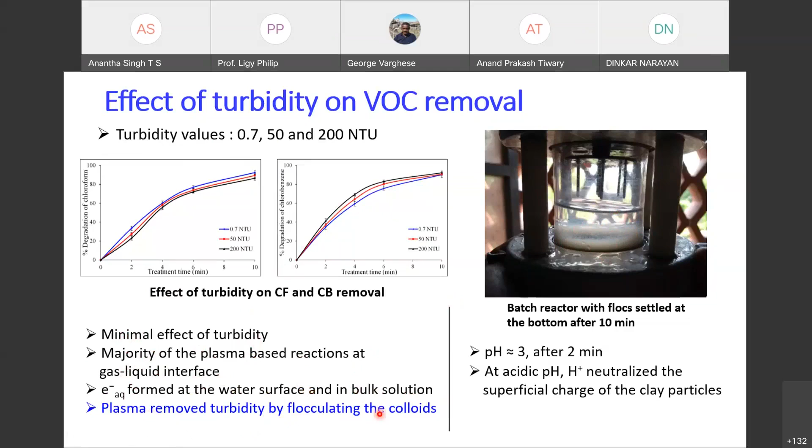Now continuous plasma degradation. We have a continuous reactor at 800 ml per minute. We used the same type of reactor, but recirculated at a faster rate. Complete degradation of chloroform, chlorobenzene, and toluene at an HRT of 33.3 minutes. MIBK removal was only 59.4 percent. As I told you, it is highly soluble, so it was difficult to remove.

And the nitrate concentration was only 18.8 milligram, though we have given a detention time of 33.3 minutes. Detention time means the total time the water will be in the reactor. That's the way we have calculated it. We also looked into a VOC mixture, and in the mixture we were getting very good removal except MIBK.

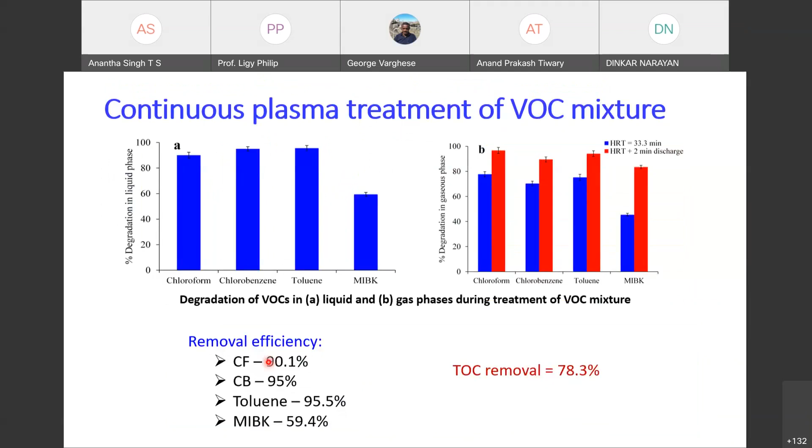We also looked into the effect of initial concentration of VOC, because we know that a lot of radicals are getting generated. So initially there will not be any effect of the loading. Only when the loading is more than the radicals generated in the system will the degradation efficiency be affected. This region we call the diffusion limited region.

So initially, it is not the radical which is rate limiting. The diffusion of the radical into the liquid is the rate limiting step, and this is the reaction limiting zone, which means radicals are the rate limiting step. This is the 100% removal line.

So we have done the diffusion limitation region and reactive species limitation region. In DLR, ROS faced diffusion limitation. In RLR, ROS was insufficient.

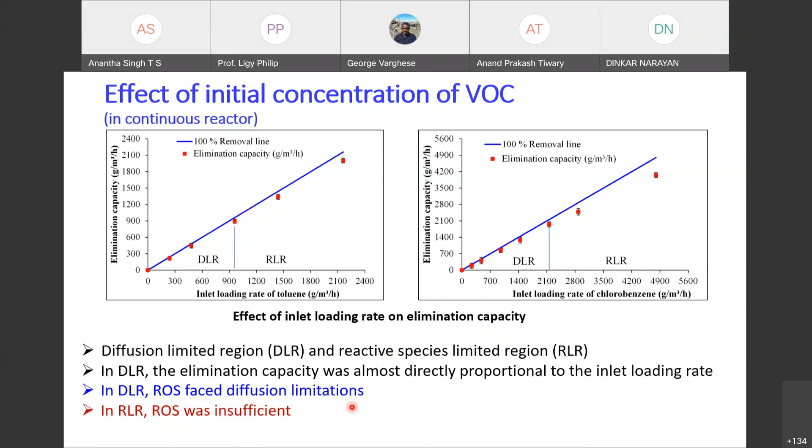Here the energy consumption is much lower than the batch system. The major reason is that spraying the wastewater increased the interfacial area of contact and facilitated enhanced mass transfer of ROS for the treatment. The electricity cost comes to around $1.85 per meter cube for actual pharmaceutical wastewater treatment. It's not that high.

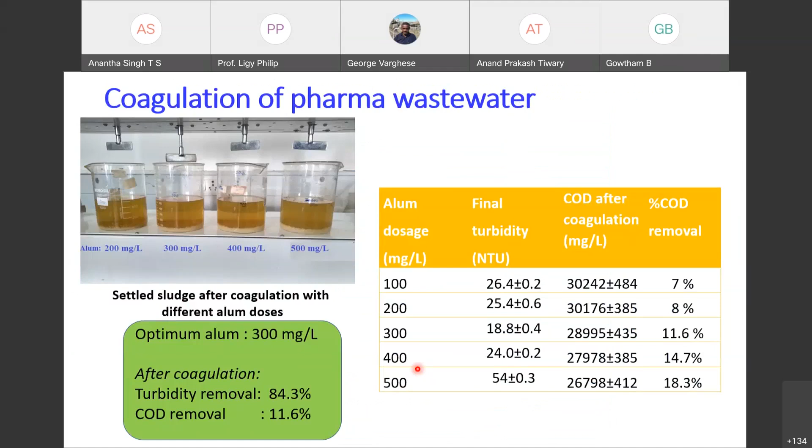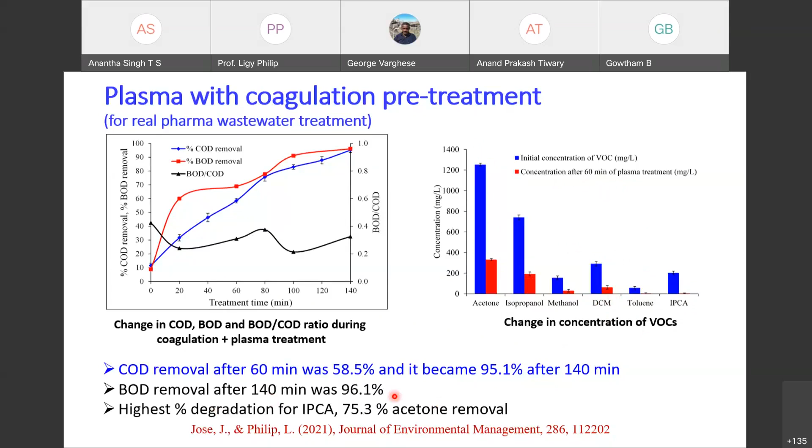Initially we did it with coagulation, flocculation, but then we thought, why should we go for that? Whether we can go for direct treatment and see how it is getting removed. So change in BOD, COD, you can see that you are getting complete removal in 140 minutes, BOD and COD. With coagulation and flocculation, acetone 73%, direct plasma you are getting 67; IPA 74, 69; methanol 80, 72; DCM 78, 74; toluene 92, 88.

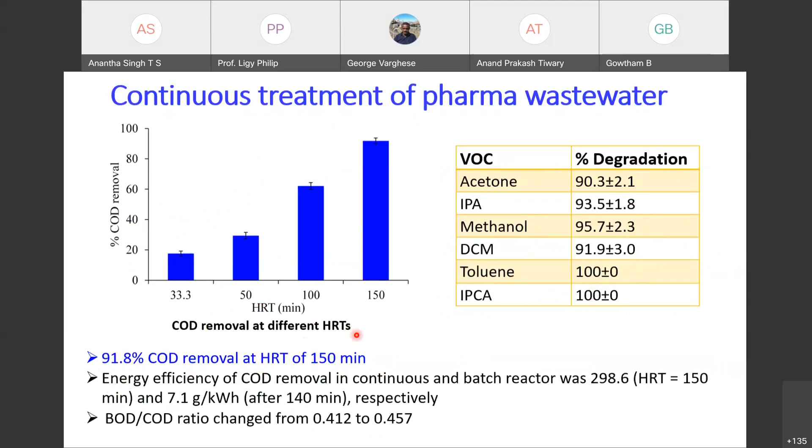This one 97, 96. What we are trying to tell is, without coagulation also, the real wastewater treatment was happening with the direct plasma. The reason is coagulation is happening during the plasma itself. Continuous treatment. So finally, we adjusted the HRT up to 150, and you are getting 100% degradation and 91.8% COD in 150 minutes. This is the conclusion. Complete liquid phase degradation. All those things we have listed.

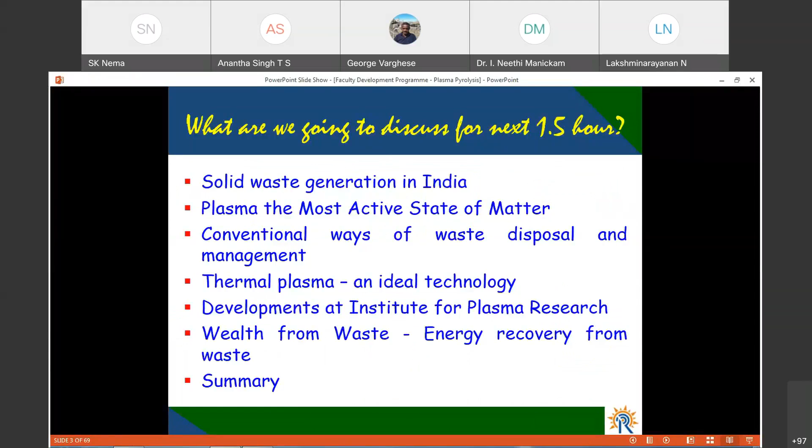Hello. Yeah, it's visible, but in grid form. It's not in presentation mode. Okay, just check. Is it in presentation now? Yes, sir. Now it is in presentation. Okay. Yes, sir. We could see the first slide.

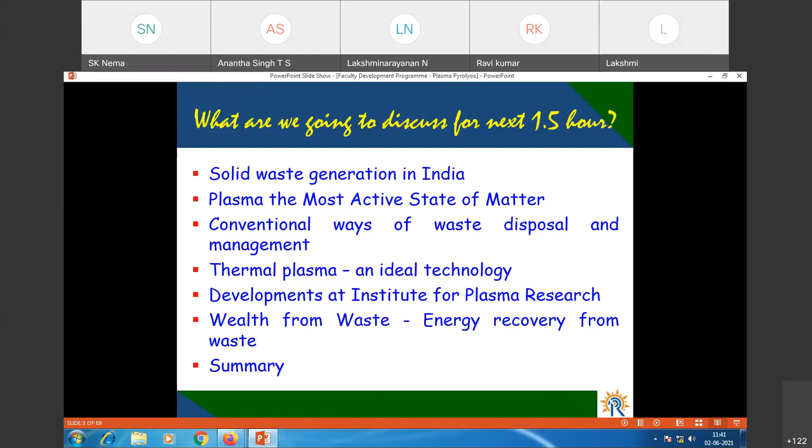So are you seeing the slides? When I'm changing the slides, you are seeing the next slide? Yeah, yes, sir. Now the waste slide is there with picture.

Yeah, right. Okay. So basically, we are generating a large variety of waste in our country, and this is also the scene in the world. Plastic waste, plastic bottles, and a lot of plastic pouches. You can see here the tire waste, the solid waste, electronic waste, and typically one person generates half a kg, 500 grams of waste on average. So India is producing more than 1.4 lakh tons of MSW, municipal solid waste, only.

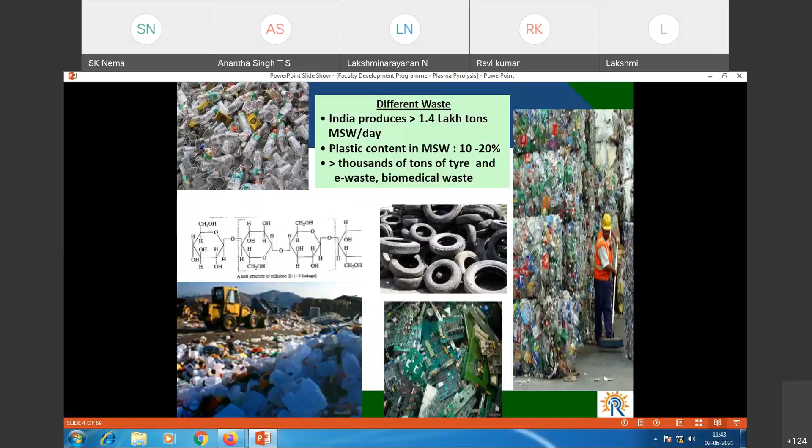This was about 4 to 5 years before. Now this quantity is going to be much more. Plastic content in the MSW is typically 10 to 20%, because many of the rag pickers also collect the plastic and sell it for recycling. There is debris and various other kinds of things in the waste. Lot of moisture and the bio...